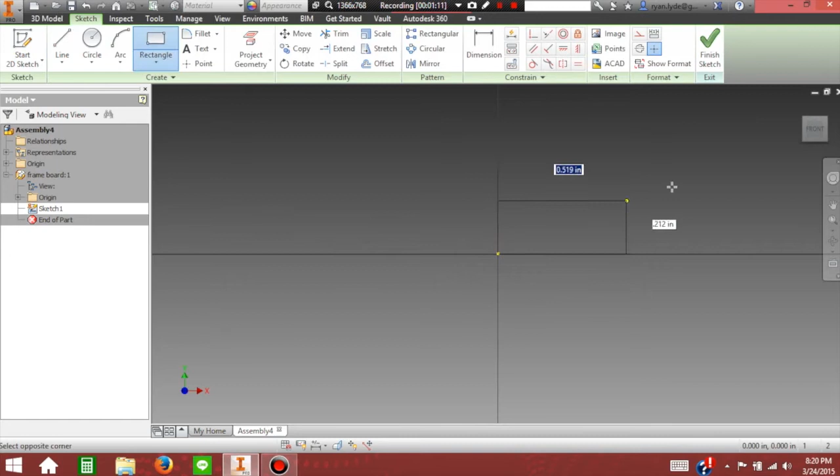So I came up with the idea I could construct 3D printed corners that are customizable and result in a perfect corner every time. Before I can test my printed corners, I need to model my frame boards and build them in the wood shop. So that's what I'm doing right now.

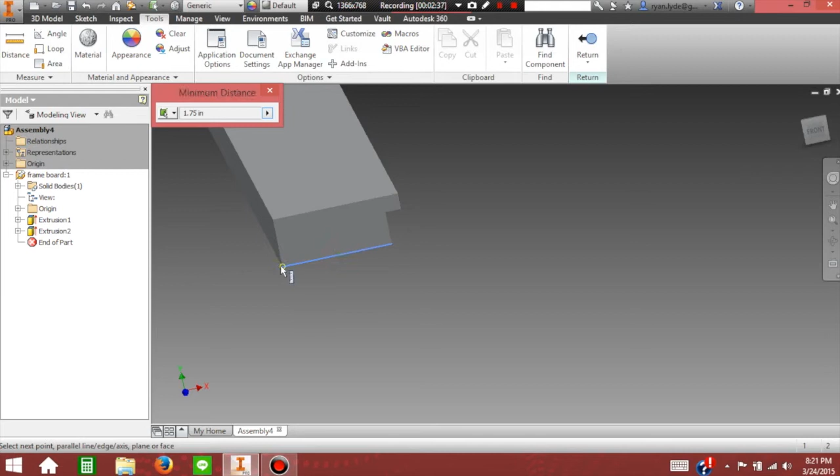I'm modeling a frame board that's roughly 2 inches wide by 3/4 of an inch thick and has a 1/2 inch by 1/4 inch notch cut in it. I believe I'll also remove the sharp edges on the top with a 1/4 round fillet.

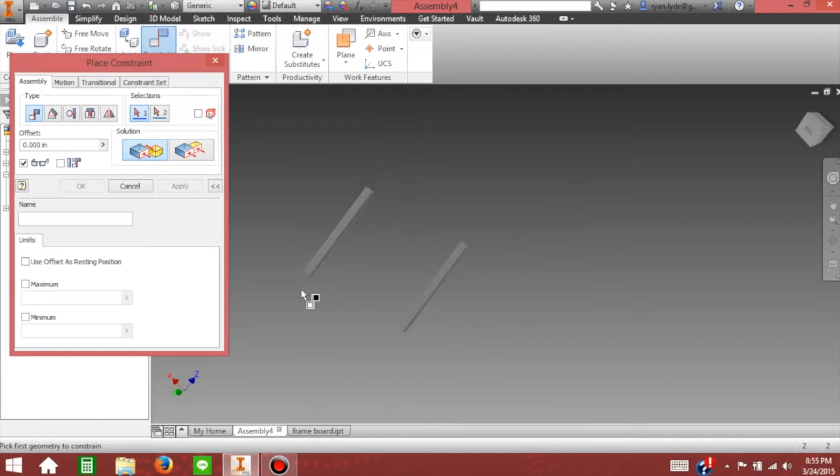Now I'll go ahead and place this 24-inch board into the assembly program and assemble these two boards together, making sure that everything is on the right plane and are dimensionally correct.

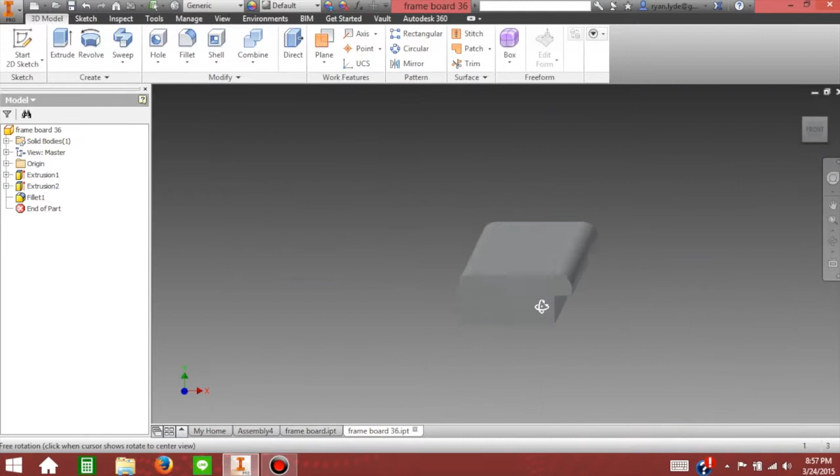Once I do this, I'm going to go ahead and build the 3-foot board by using the 24-inch board as a template. I'll just go ahead and edit the extrusion feature to 36 inches. It makes things really easy.

Now let's go ahead and assemble the frame boards into their final spots.

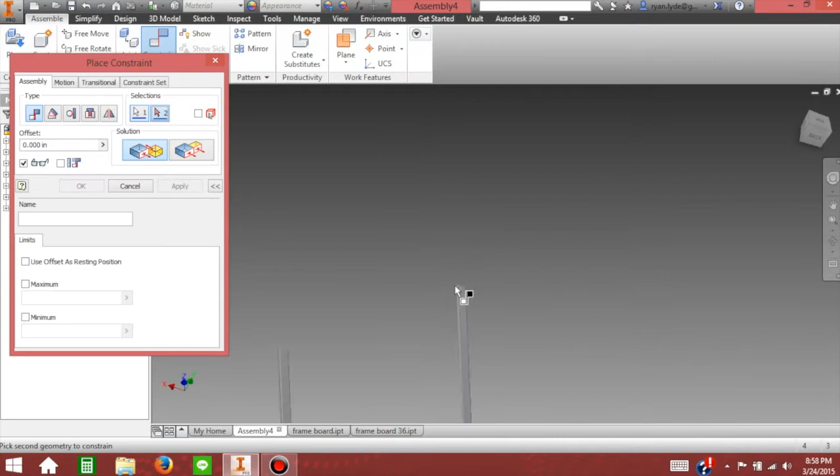Assembling the frame boards. Okay, let's make everything on the same plane and constrain it out to each other. This way things don't fly around when you move around.

Time for an extreme woodworking montage.

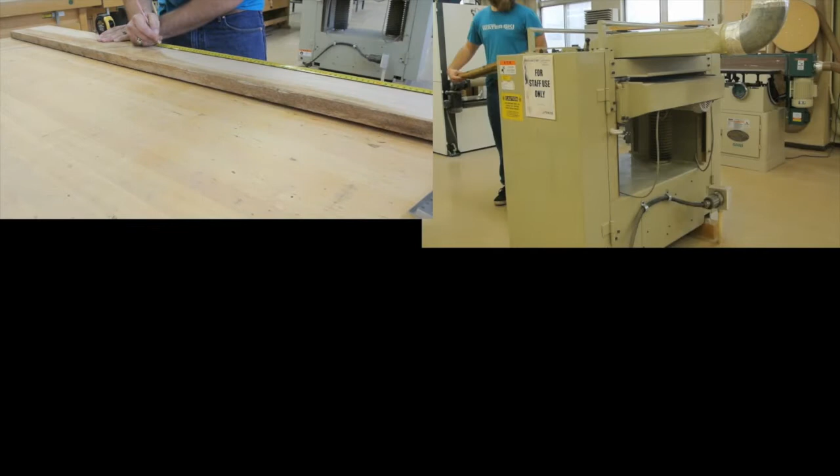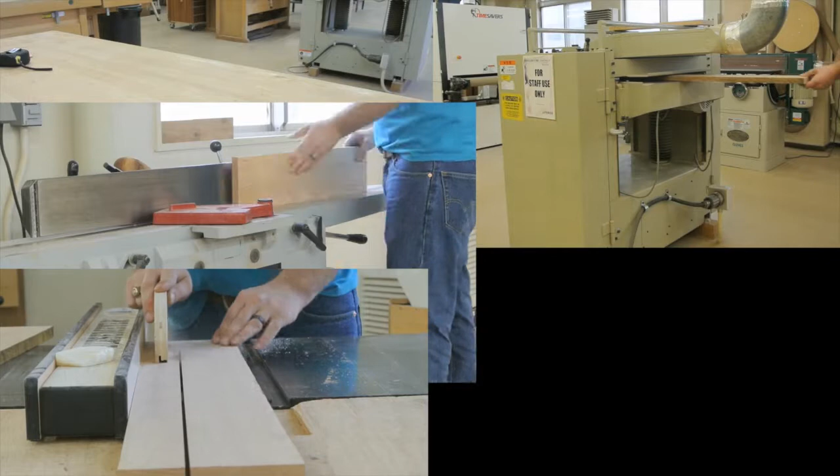1. Measure the board and cut it. 2. Plane the boards down. 3. Joint it with the jointer. 4. Rip the board to 2 inches. 5. Put the notch in the board. 6. Trim the board to the final lengths. And finally, number 7, remove sharp edges with the router.

Yes! Work with that wood. Do it faster.

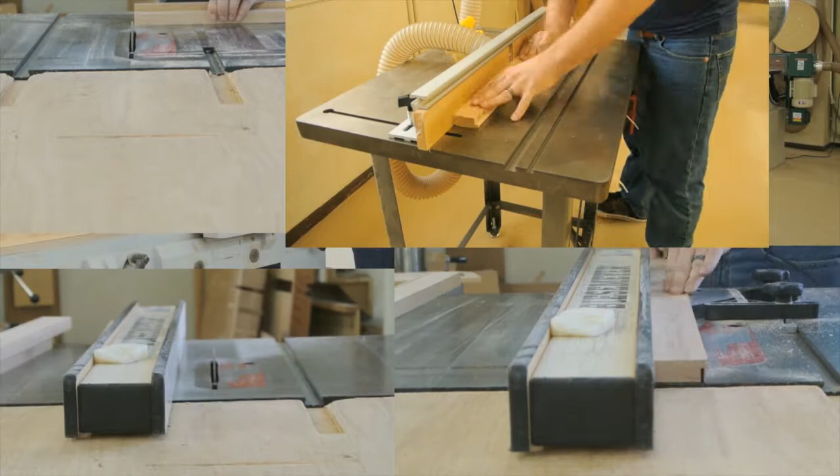Faster. And be done. Okay, so I came back with a little sliver of wood that I did, and I have my calipers here, so I'm gonna go ahead and measure everything and update the dimensions so that I have a pretty good idea. When you're measuring, you probably want to get down to a good 5/1000ths of an inch.

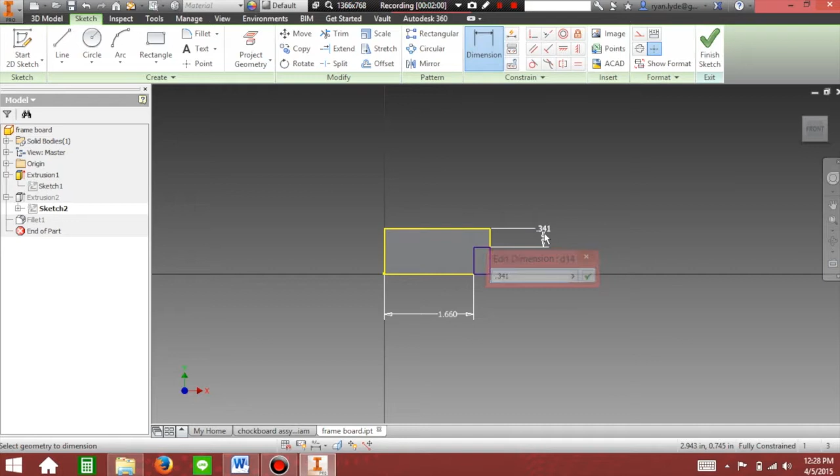No, 1/1000th of an inch. You're not going to be able to measure it exactly. You can measure to 1/1000. I know you can. So don't be too stressed about getting things the exact same dimension. I'm stressed about it. Just have everything a rough dimension. You don't want to be on the smaller side. You want to be on the bigger side of things. The bigger side of life.

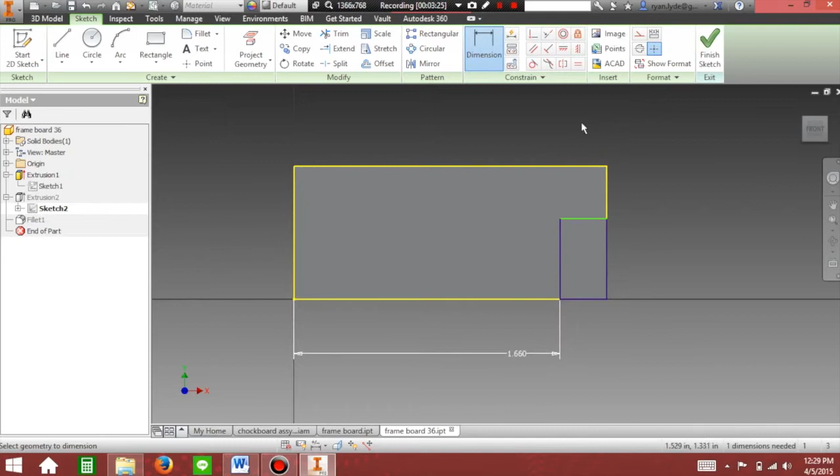So once I get done updating the frame board with the correct dimensions, I'm going to go ahead and build a test piece for my printer to print out so that I can measure it and see what type of offset I need to model with. This way I can actually model one time and print one time without having a bunch of failed prints.

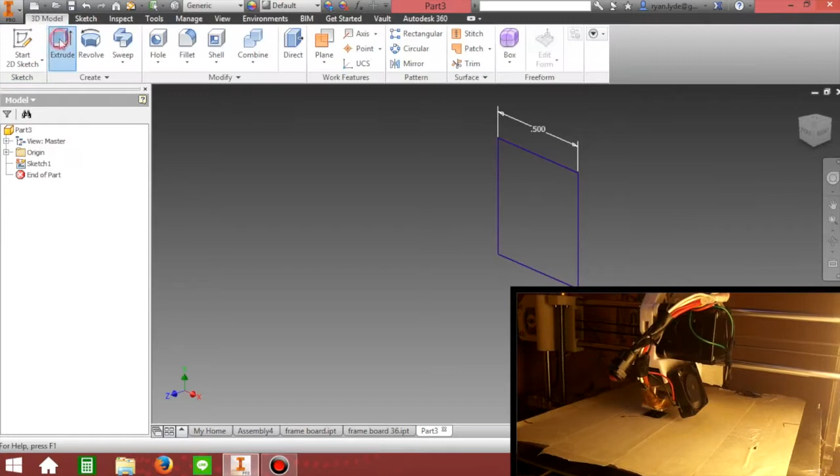Knowing your printer's offset is very important when it comes to modeling. Look at it go! That way you can get things right the first time.

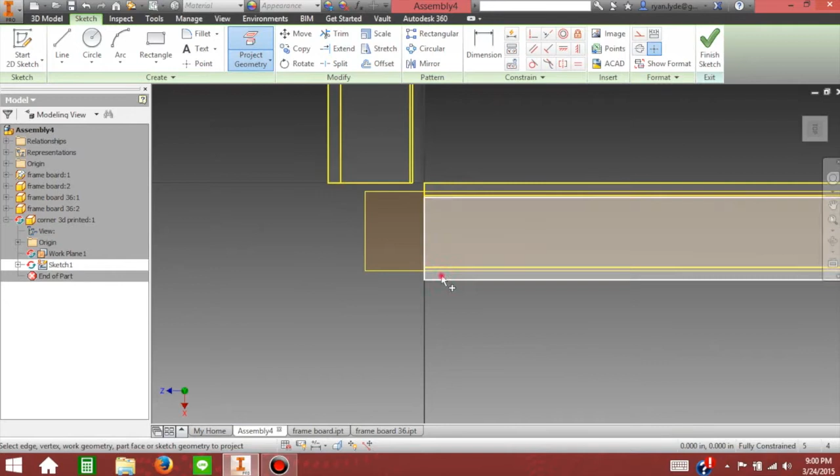Alright, let's go ahead and start modeling that corner. Right here, we'll just go ahead and get the rough dimension of the corner. We'll set things equal to the frame board, plus we want the frame board to go in the corner about 1 inch, and we want it to be the same height as the frame board.

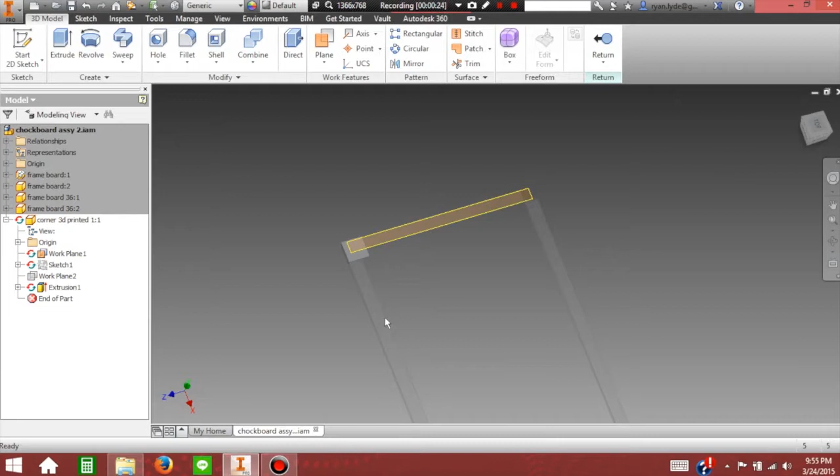Now let's go ahead and add the material around the frame board, what's actually going to hold the frame boards in the plastic corner. So we need to add a little bit. We need to add 1/8 of an inch, plus the offset of the printer, which is 35 thousandths.

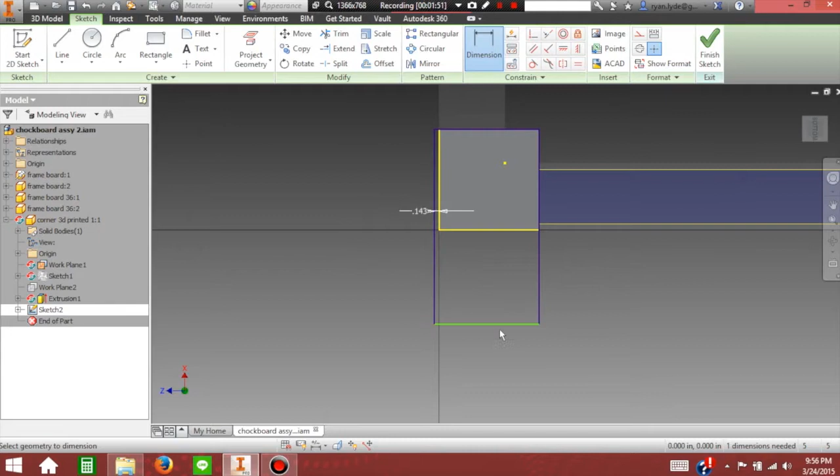Okay, so we'll keep the 1 inch dimension, and then we want about 1/8 inch of plastic holding the frame board in. But we also have to account for the offset of the printer, which is 35 thousandths, and we'll divide that by 2 because the board is actually going inside. Once we got the sides, let's go ahead and do the top and bottom, adding about 1/8 inch to the top and bottom of it all.

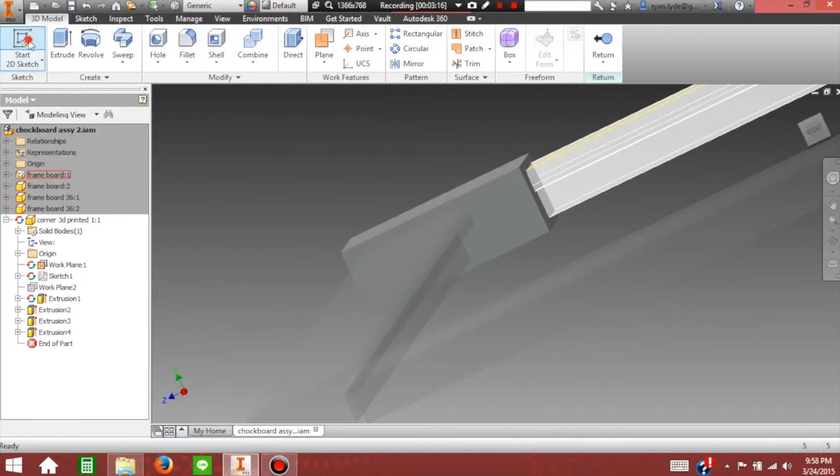Plus the offset. We'll go ahead and project the geometry of the frame board and add our printing offset, which is 35 thousandths divided by 2, and remove that material. There's a rough idea of the actual frame board going into the plastic.

However, we need to remove some more material so that the chalkboard will fit into our frame. Now this dimension here needs to be pretty small because it's going to affect the actual size of the chalkboard. However, I can't go smaller than a 1/16 without it being structurally unsound.

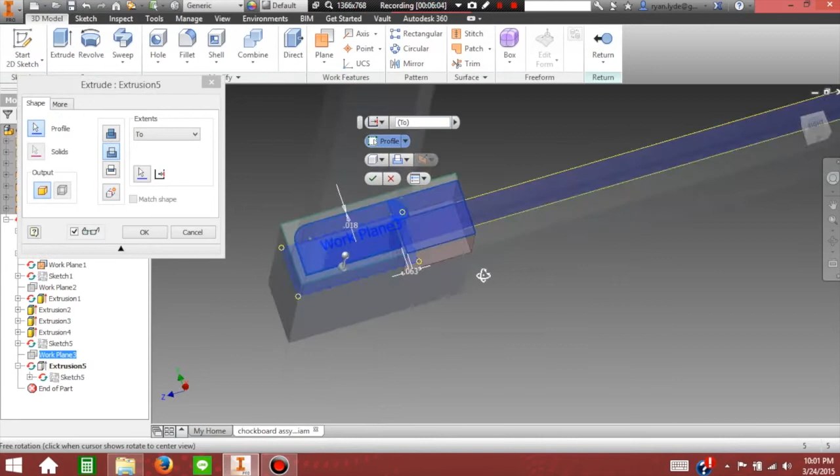Hey, it doesn't look like a box anymore. And it looks pretty good.

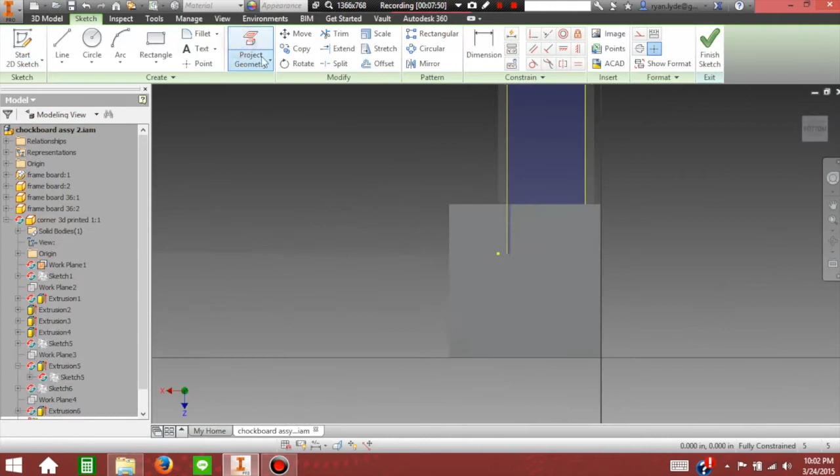Let's go ahead and do the same to the other side real quick. We'll add our printing offset and remove some more material. Unwanted material, be gone. And we have this little notch here, so let's go ahead and remove that notch.

Alright, so in theory, this corner should give us a 90-degree angle and hold our frame boards together.

Let's go ahead and add some artwork to the top of it and make it look beautiful. I'm going to go ahead and use an image of a light bulb to help me model, because you can't draw it free-handed.

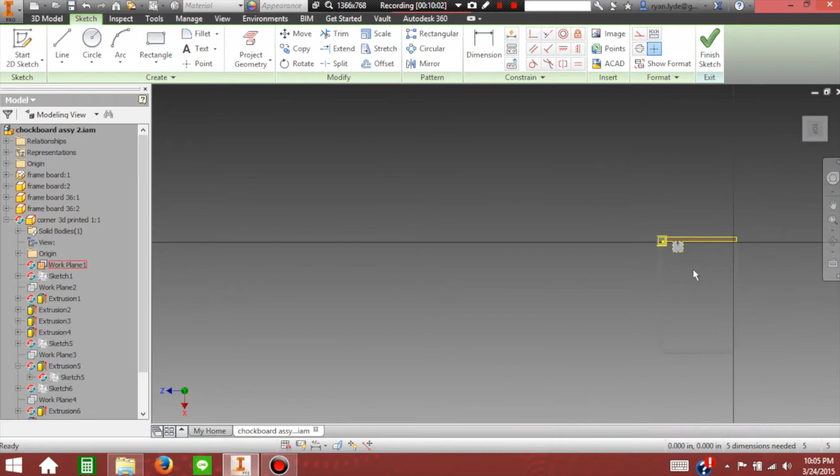We'll go ahead and set this image up, straight up, and get it constrained to our actual plastic corner that we're modeling. Once we get it all constrained out, we can start using it as a reference to set our light bulb profile.

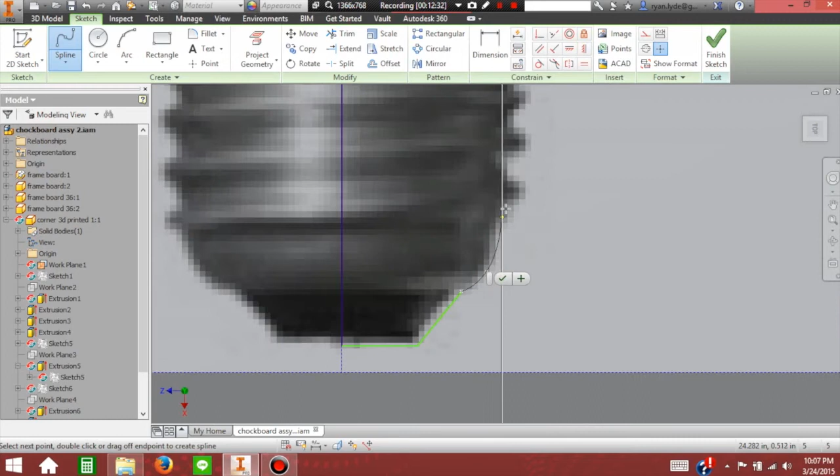Now, using the spline tool, we're not really using any dimensions here. We're just kind of following the edge of the image to help us get a good idea of what a light bulb should look like in a 3D world.

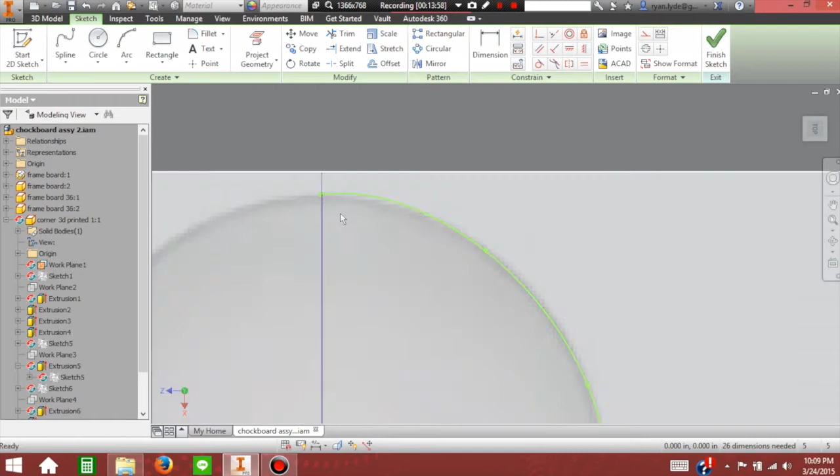You're not doing very well. You need to readjust. Readjust it.

We'll revolve it. There we go. Revolve it 180 degrees. There's a light bulb.

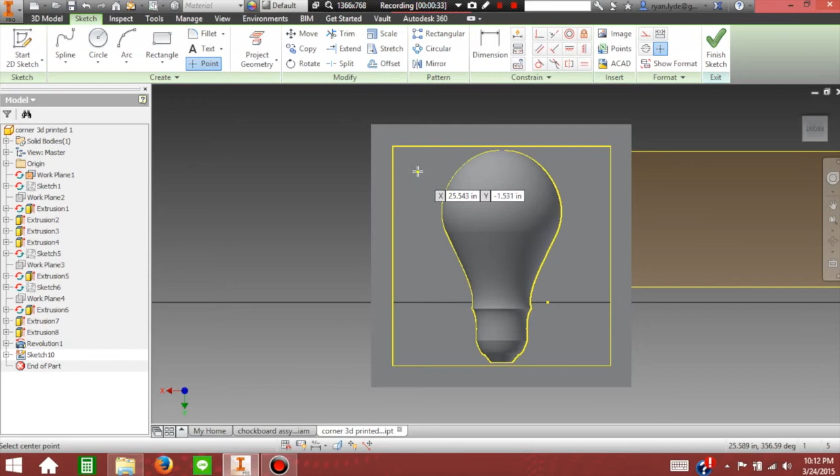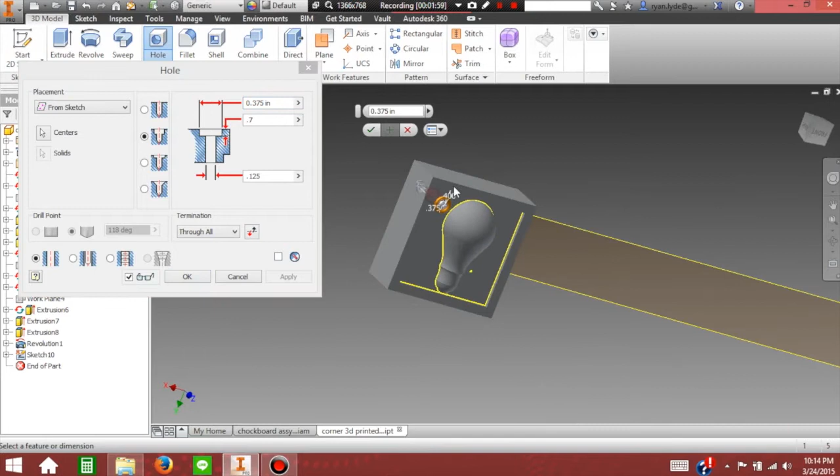Now let's go ahead and add a hole to it so that we can mount our chalkboard on the wall. We want our hole to have a countersink, and typically you could get away with a screw's diameter being 1/8 of an inch. However, we don't want a 5-inch screw, so we'll countersink it to where there's about a 1/4 inch of material and offset the countersink so that we can have a 3/8 dowel rod go into the hole.

Now it's time to do a rough assembly. Looks like everything's fitting together pretty well.

Sand the boards, clean the boards. Stain the boards with ebony stain. Then seal the boards with the polymer. Polyurethane sealant by Minwax - everything's done by Minwax. Make things look beautiful again.

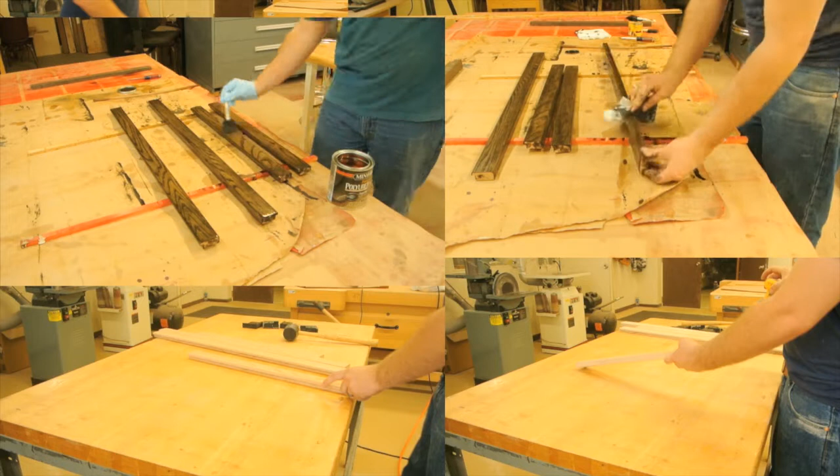Are you done yet? Why does staining take the longest? Hurry up and be done with staining the boards. It's just black stain. Yes, be done. Hurry up.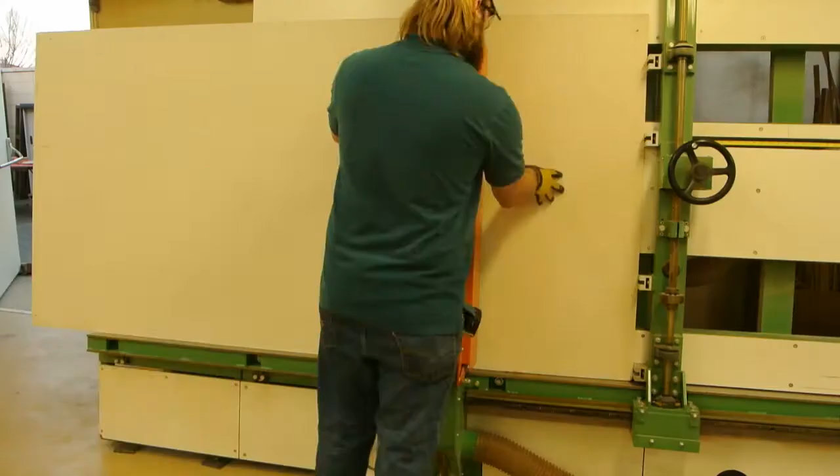Okay, build the chalkboard. Cut a piece of plywood down to 2 foot by 3 foot. Cut it. You must have got that plywood for free because it's painted.

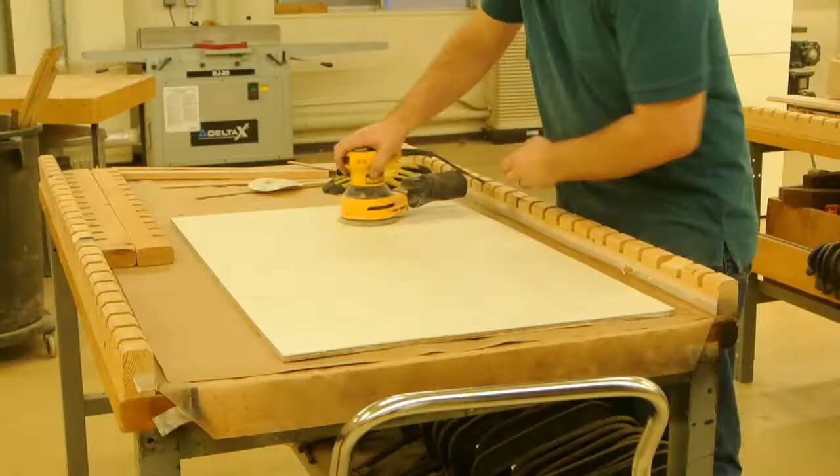Now sand the plywood down, make it nice and smooth like. Then clean it off with air.

And now paint it with chalkboard paint. Yes, paint it just like that. Make sure you do an X pattern with the paint so that everything is nice and level. The paint is nice and level when you do an X pattern.

Hurry up and be done painting the plywood.

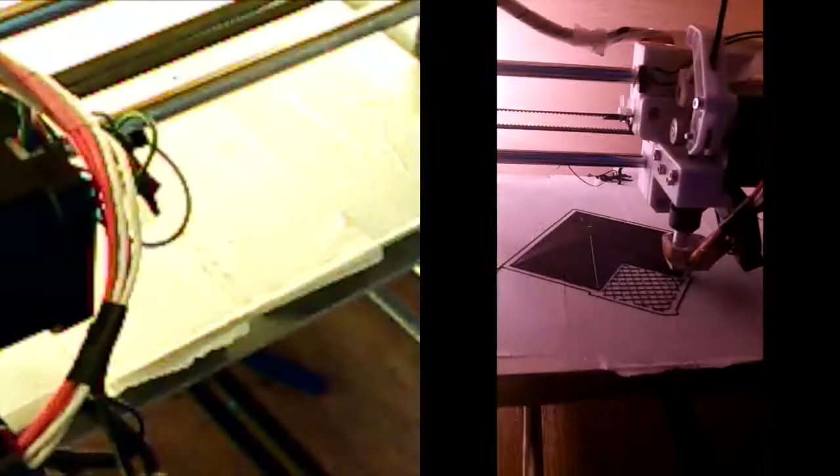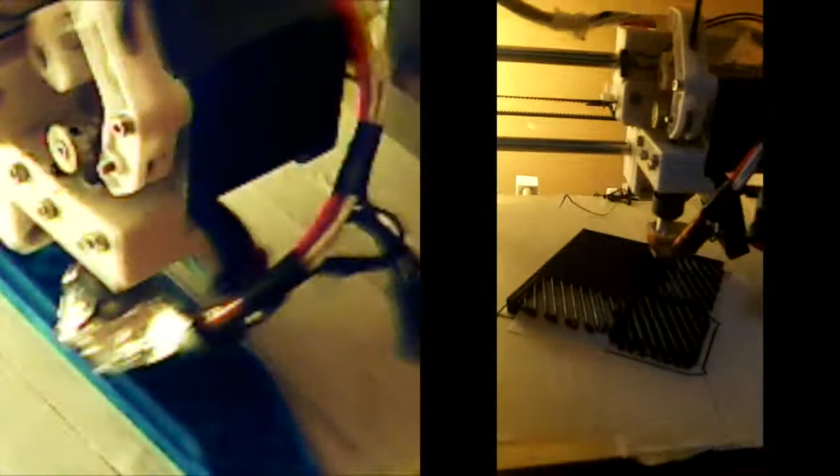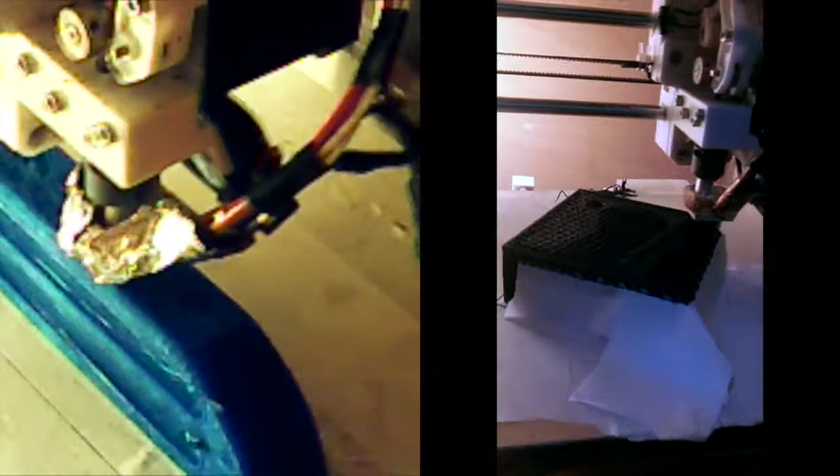Yay! 3D printer time! So much printing! Even more printing! Oh my gosh!

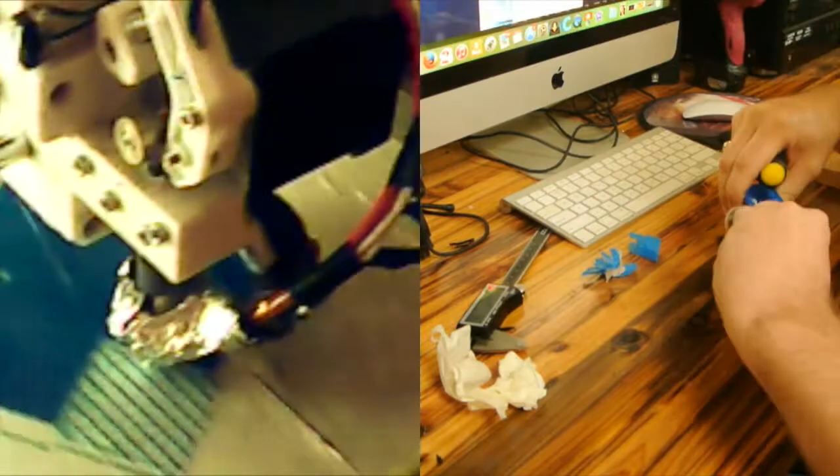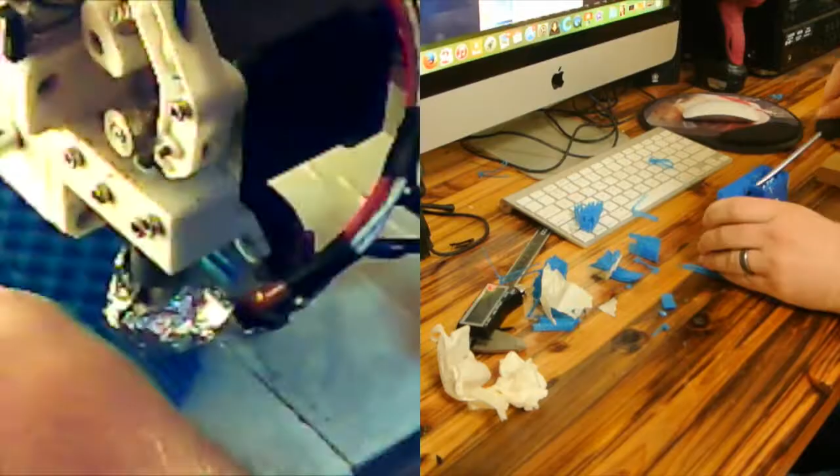Hey, what are you doing? You're destroying the part you just printed. Why? Why are you destroying it? It was so pretty.

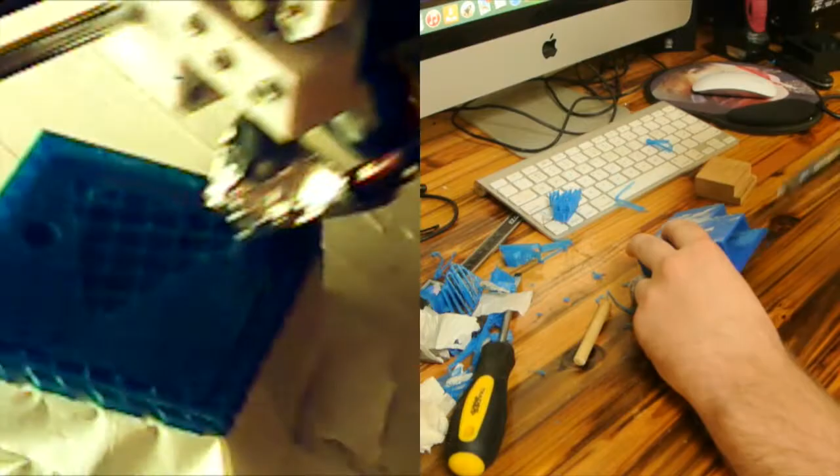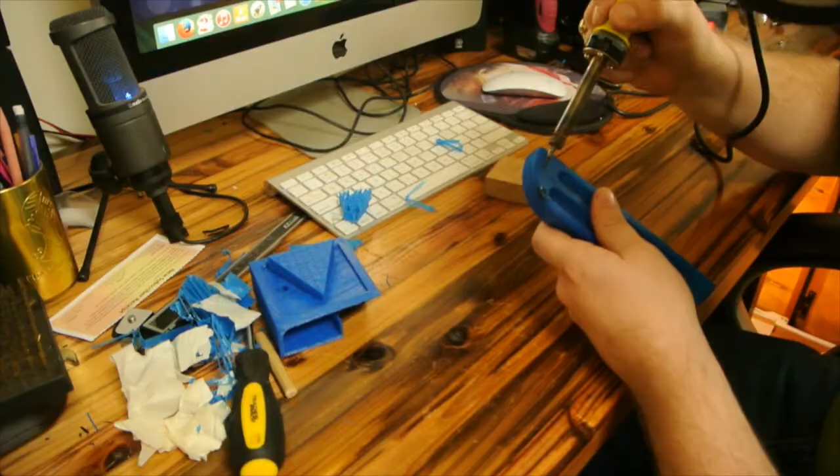So after removing all the support material, I used a soldering iron to smooth down all the bumps and ridges on the inside. It really worked out pretty well. I think I'm going to continue using this soldering iron trick to help out other parts as I print, because not everything ends up perfect and some things do need to be removed, but with the soldering iron you don't have to get a knife out and try to remove it - you can just melt it down. It worked out really well.

Time to assemble the chalkboard. Finally! So after spray painting my blue parts black, everything turned out pretty well. And now I'm just going to go ahead and screw the boards into the plastic and make everything join up correctly.

However, I did have some melting issues on the black PLA, printing out the light bulb and the spaceship. The PLA that I used wasn't the best - it was really cheap, and I don't think I'm ever going to go back to that brand again, just because I had so many problems with it. The PLA wouldn't even roll off the spool to go into my printer. It would go a little bit and then just break - it'd snap apart, it was so brittle. It was a pain to print with.